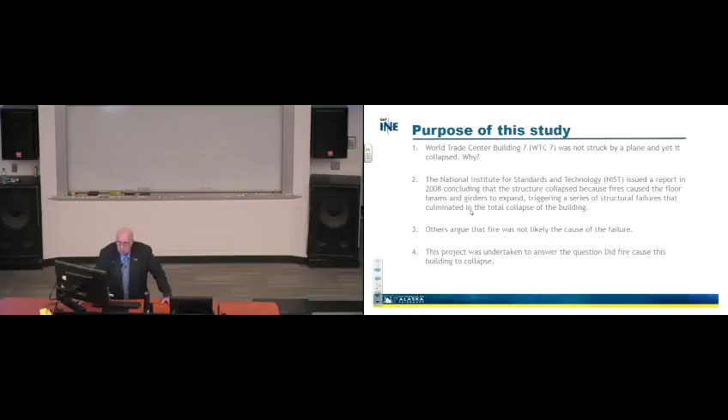More importantly, since this is a progress report, this is not a traditional slideshow with just bullet points. There's quite a bit of prose here, and the idea is that this will go out and be available for you to read additional information if you would so choose. We're going to be transparent. We welcome any questions. We're making everything we've done available, so that everything we've done is scientifically tested. We'll have a peer review committee to make sure we've met all those standards.

The methodology: today I want to share that with you. We first assembled the available documents, construction drawings, etc., that were available for this building. Traditionally, I would have liked to go in and pick up all the pieces of the puzzle and put it back together like a typical airplane, but they did not exist, it wasn't available. So we've done the best we can with all the available documents.

Basically, what we did is create an AutoCAD drawing to build a virtual geometry of this 47-story building. In digital form, you should be able to see every piece, every puzzle, every member, and it should look exactly like what was used in that structure. That's what we did.

We then prepared an Abaqus nonlinear computer model for the connections and framing of this building. That's a fairly sophisticated finite element program available that enables you to look in detail at how something will respond under a set of conditions. I know I have a mixed audience here, so I'll try to keep it as simple as I can, while sharing some pieces of complexity so those in the technical arena can appreciate that we looked at this in a fairly sophisticated way.

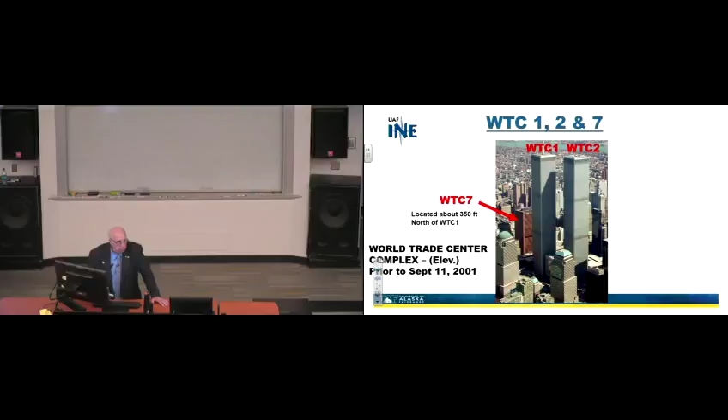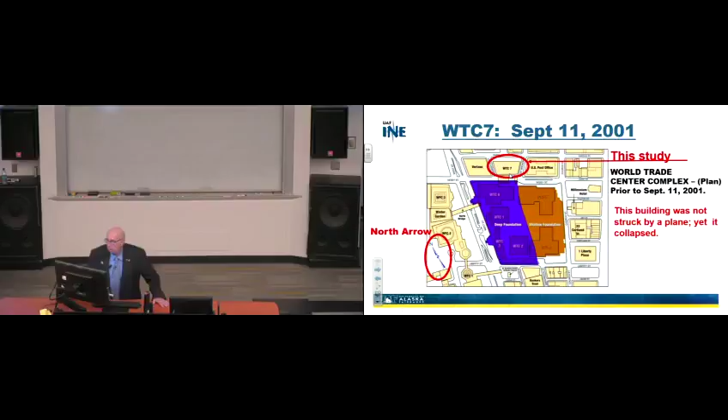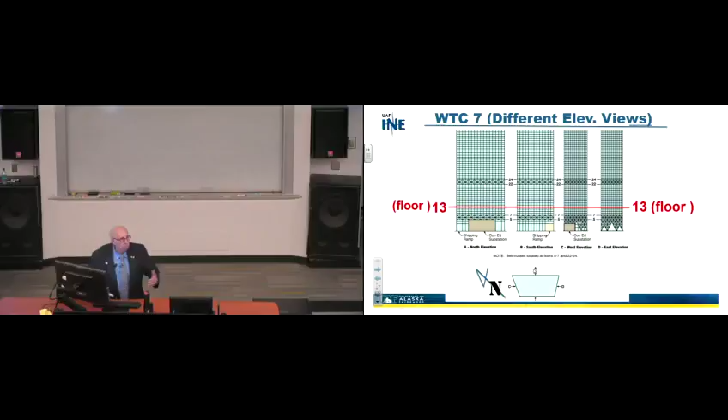So here is the south. Notice it's not as wide. And then here is the west elevation and the east elevation. Now within that context, here's floor 13, because we're going to spend a lot of time there. So you'll have some understanding of what's going on in that area.

Here are these perimeter trusses I was telling you about, at floor 5 and 7 and 24 and 22. Those trusses are resisting lateral loads. And then in the plan view, you see A, C, D, and so forth. There's that building in plan view, and here's what we're looking at. And down below here is the Con Edison substation, shipping, and so forth, all the things going on down there. So that's what it's built on.

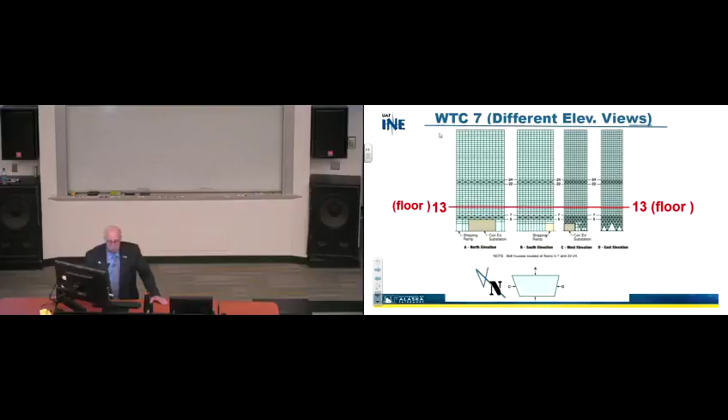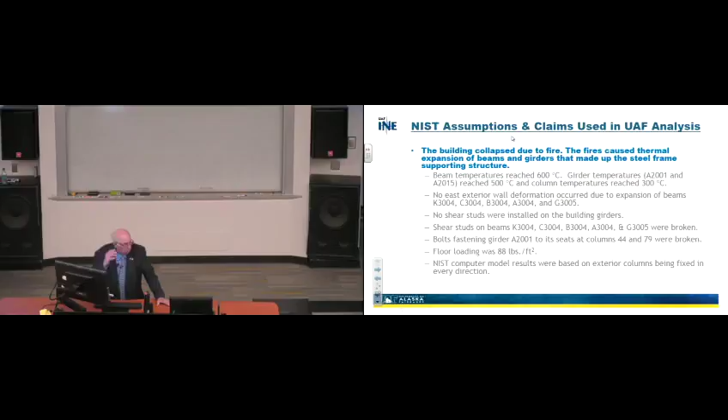But there are so many questions concerning this system. We looked at it from composite, partially composite, non-composite - meaning the slab can slide over the steel, not slide on the steel, or partially slide over the steel. We looked at all those possibilities. We also looked at whether the fire was underneath burning up the ceiling, or burning down the floor. All those issues were examined.

Here are their assumptions: the beam temperatures reach 600 degrees C. The girder temperatures, A2001 and A2015, reach 500 degrees C.

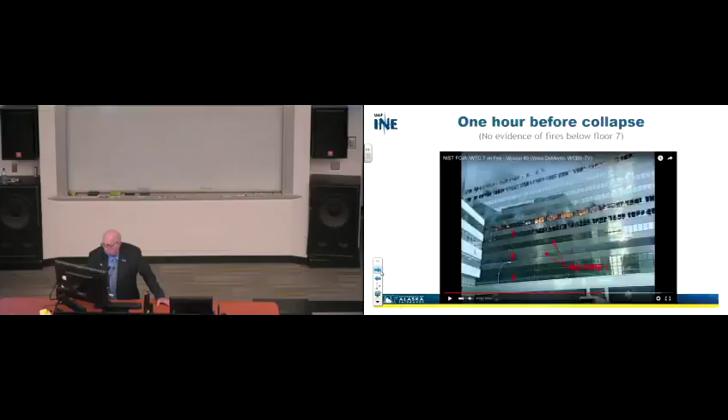The beams didn't get that hot. When we take a look at the girders, they reach 500 degrees C, and the column temperatures only reach 300 degrees C. Now that's significant, because there's a point in time, and I'll show you in a moment, whereby the steel begins to decrease in strength and modulus when you reach a certain elevated temperature. So the first thing I would have thought about when I got involved here is, okay, the columns obviously got really, really hot, and they lost strength, and we would have ended up losing the building.

Nobody seems to think that ever happened. Furthermore, there weren't a lot of combustibles in there. So no east exterior wall deformation occurred due to expansion of beams. That's their assumption, in beams K3004, C3004, and so on.

All right, so now moving on with that idea in mind. We've got all that beautiful thing captured in our minds, we're ready to go. So there were no shear studs installed on the building girders.

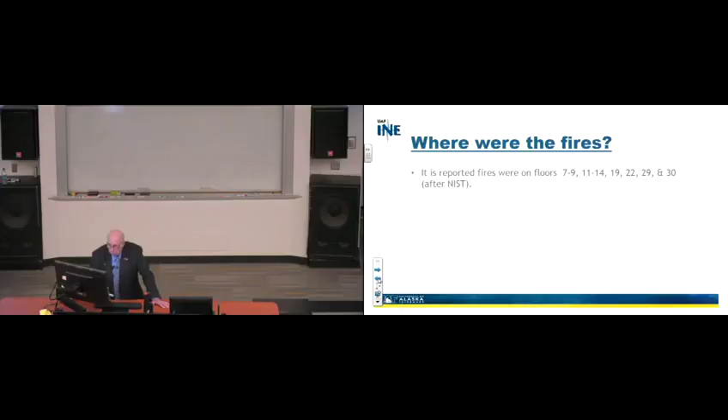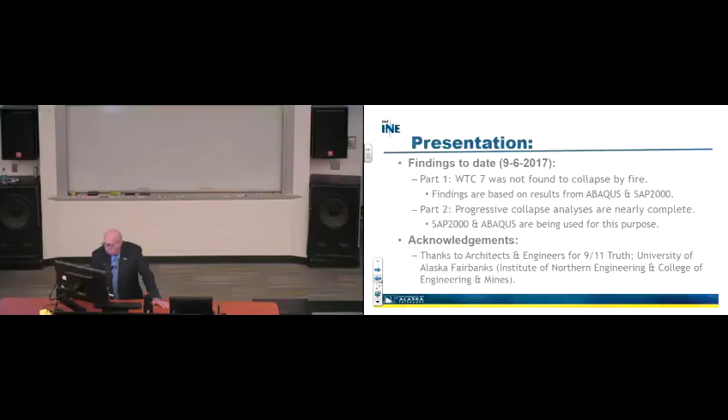The bolts fastening girder A2001 to its seat at column 44 and 79 were broken. That's significant. So let's go back here - here's 44 and there's 79. And they're saying the connection of this girder to those beams, to those columns, the seat connection, did not function during that period and therefore lost support, lateral support, and produced a problem.

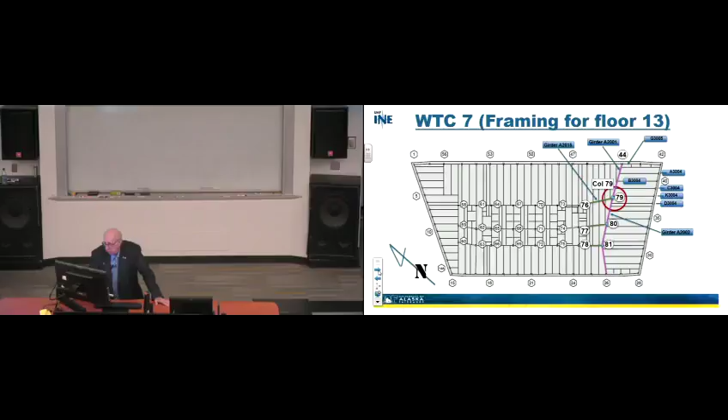So they've lost those supports, meaning those two columns no longer have lateral support at that level. Did they possibly have a problem later? The floor loading was 88 pounds per square foot.

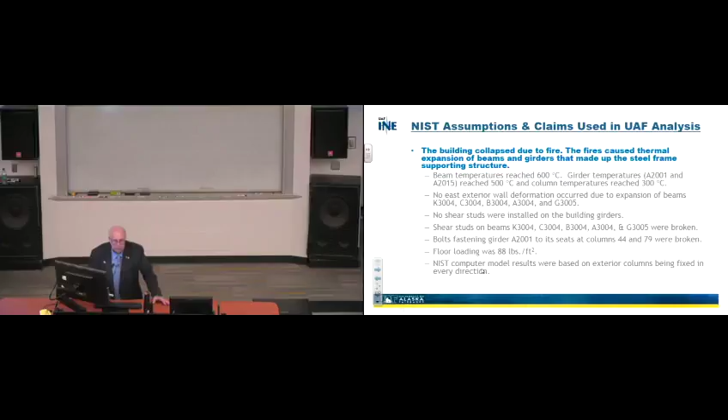The NIST computer model results were based on exterior columns being fixed in every direction. That's kind of a significant thought. All right, so now looking at their plans - this came out of the NIST report, page 343, 2008. This gives you a geometry - that's a 45-foot length from 44 to 79.

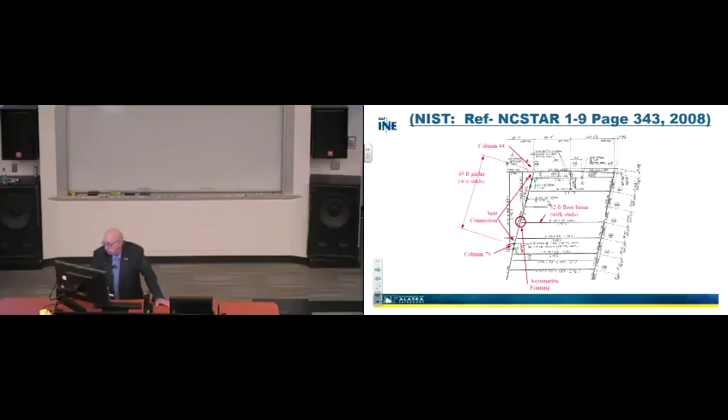45 foot, that's a girder length. 45 foot, that's longer than this for sure, you see what I'm saying? That's not small - this is a huge building, 600 feet across, for God's sake. So here is 50-some feet here, 52 feet across.

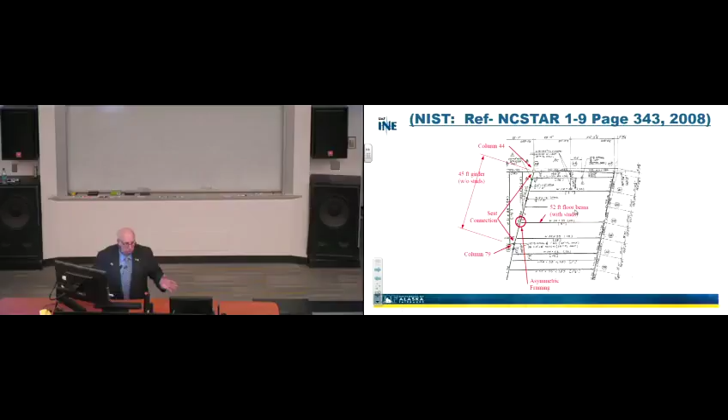This is our exterior wall, I'm in the northeast corner of this building. Is that clear to everybody? Here we are in that trapezoid world. Notice that there's asymmetric framing - these beams, those beams, for God's sake, are 52 feet long. That's not small. I mean, where in the world do you see that kind of stuff?

So anyway, in their view, by taking a heat model, putting fire on it, and then subjecting their finite element model to an increase in temperature, they got a thermal expansion. Their thermal expansion looks like this - that actually is this girder right here, A2001. It expanded, and they said it pushed off of this bearing seat, and thereby they lost support.

And then these cascaded downward, okay? So that's basically what we're talking about here. There's that girder I'm talking about, there's that exterior, and here are lateral supports for this beam system through here.

So what were their conclusions? First of all, fire-induced weakening of critical columns did not cause WTC7 to collapse - okay, didn't get hot enough. They're saying that 300 degrees is not hot enough. No argument. Temperature in column 79 was below 200 degrees Celsius. I think that's true - I might have to look that up as a reference again, but I'm pretty sure that's about what it was.

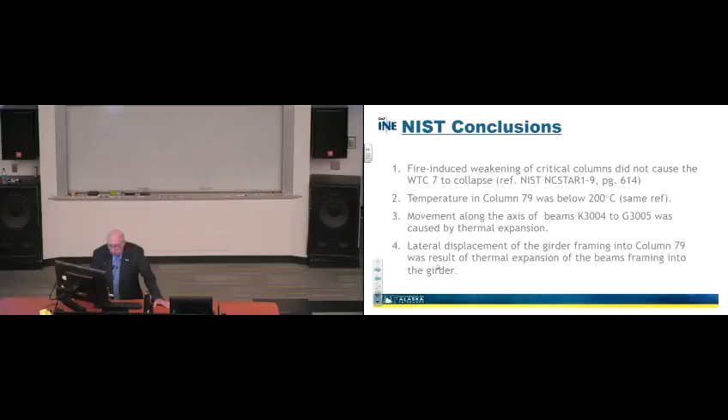Movement along the axes of beams K3004 to G3005 was caused by thermal expansion. Then the lateral displacement of the girder framing into column 79 was a result of thermal expansion of the beams framing into the girder. All we're saying here is when these heated up, they got longer. This was fixed, so they're all going to move to the left - that means they move what direction? West. And in moving so far west, what happens? Well, they're going to try to move - is there enough space to hold them in place?

That's what their argument is, right? That's key right there. And that's what it looked like - bang, bang, bang, bang, right? This thing bowed outward, and so this moved and that moved.

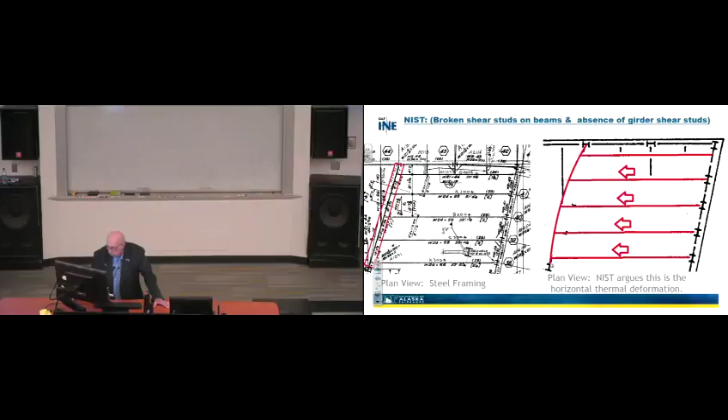Okay, this is the cascade issue they mentioned. The buckling initiated here at floor 9. All these issues mean they lost lateral support of that column. This is column 79, the one we've been focusing on. Without any lateral support, and because of that length, it cannot take nearly as much load as it was designed for.

Consequently, the vertical support and lateral restraint exist in the north only, so there's a huge problem. There's full lateral support up here, and partial lateral support down below, down at the very bottom in the Edison area. Those are all laterally supported. But between this zone, they said, it went away.

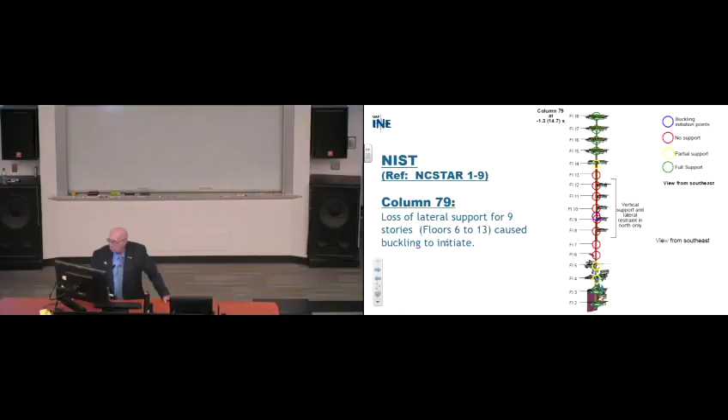So the loss of lateral support for 9 stories, floors 6 to 13, caused buckling to initiate, which means you lost it. Okay? Is that clear? Everybody clear about what I'm saying here?

Now let's take a look at their model for a moment. This is looking at a partial view of that trapezoid, down here, partial. We're seeing a partial of it. This is the northeast corner. There's column 79, and in that blue area, it's kind of significant.

That blue is where they put, at every place a beam and a girder come together, a column to girder connection, a beam to all these kinds of things, there's a connection that's on the drawings that says here's how you will build it. You bolt it together, you make it do whatever you want it to do, and that's the way it was supposed to be built. Remember the north arrow is here, this is the west side, the east side is to my right.

This is after NIST, the area of floor where connections were modeled on floors 8 to 14, and that's in the blue area. Over here, that wasn't done. So there's column 79, here's the area outside of the thing, and now let's take a look.

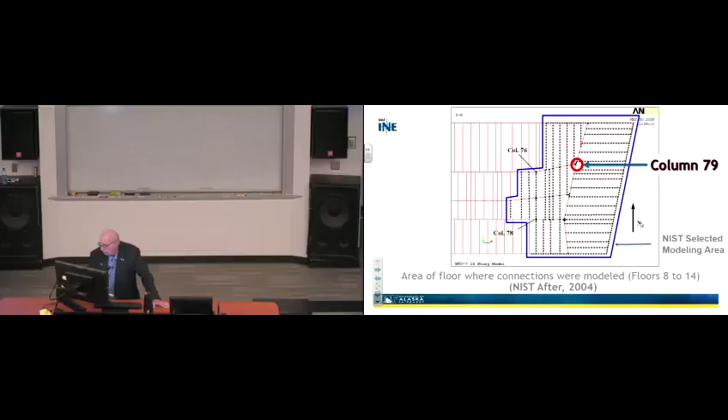Outside the selected area, connection failures were not modeled. NIST used fixed or pin connections. So automatically you have to ask yourself the question, do they have the same stiffness as what was modeled here more accurately? And so the corresponding question is...

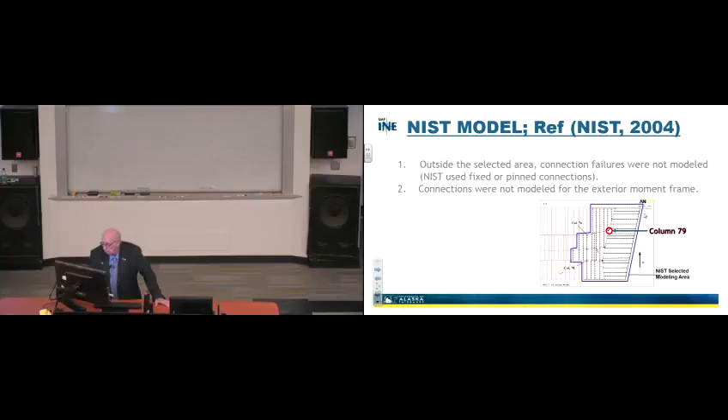Does it have an influence? Does it change how the system is going to respond? The connections were not modeled for the exterior frame, and the columns themselves were treated as fixed.

Also in the NIST documentation, page 525, 2008, a girder was considered to have lost vertical support when its web was no longer supported by the bearing seat. That means if there's loss of bearing support on A2001 coming into column 79, then it's lost. The bearing seat at column 79 was 11 inches wide.

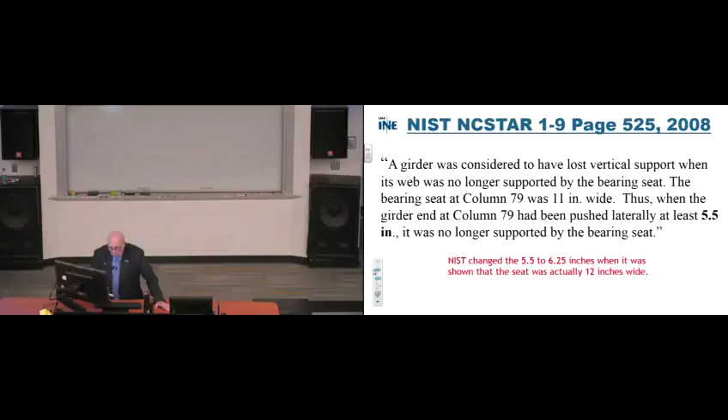Thus, when the girder end at column 79 had been pushed laterally at least 5.5 inches, the web was no longer supported by that bearing seat. NIST changed that 5.5 inches to 6.25 inches when it was shown that the seat was actually 12 inches wide. So that's something to think about - why did that happen? And that was later.

So some of the NIST results are the following. Pardon me if I'm boring you, but this is a passion for me. Let's just take a look at what actually happened.

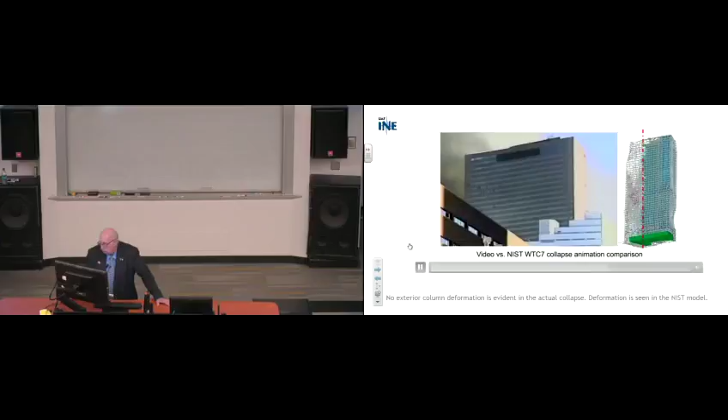Okay, so anyway, let's go on. Here's the NIST model that we were just looking at. And here, this is the other side, flipped, where that modeling was actually done. This is column 76, 78, and 79 is in here. They were looking at this finite element progressive model they were using to look at that.

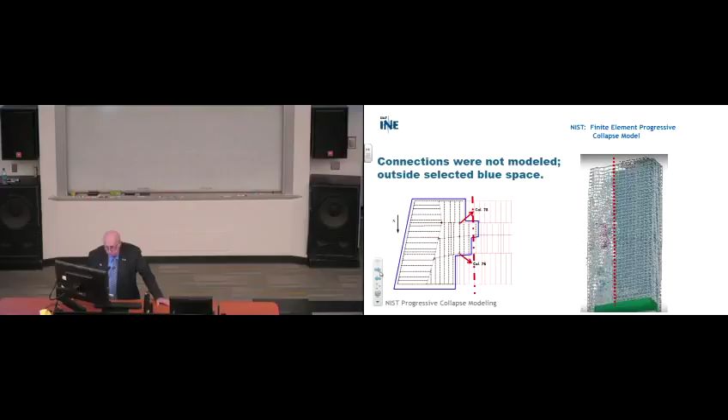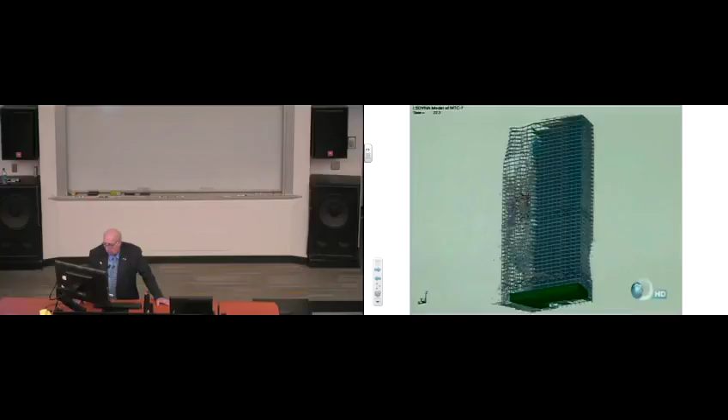I suppose we could even look at it from a different perspective. And there it is again. This is what they're doing. You have to ask yourself the question, though, why is it so much different on one side than the other? You see what I'm saying?

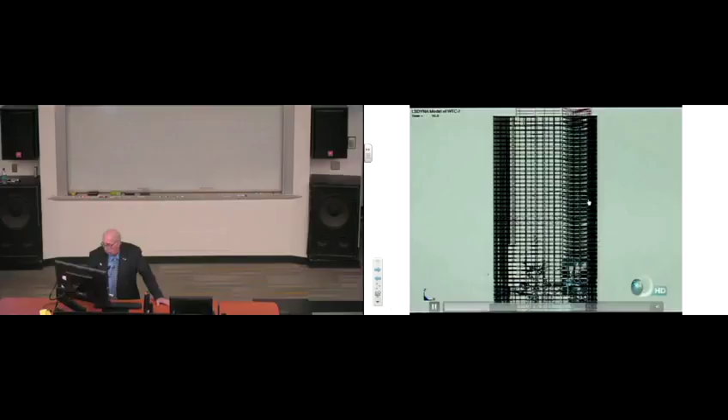And here's things that they, because of some damage that came in from the debris falling through the windows and stuff, they're accounting for some of that stuff. Anyway, all right, so let's talk about UAF for a moment.

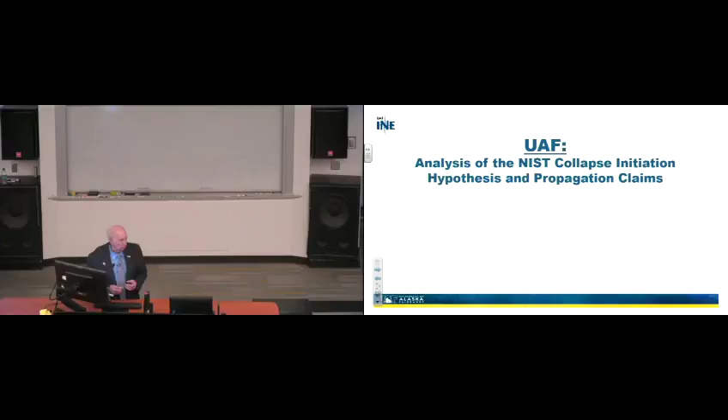Analysis of the NIST collapse initiation, hypothesis and propagation claims is really what we're about to embark upon, which is how valid is some of this stuff from a science point of view.

So UAF analysis of the NIST collapse initiation, hypothesis and propagation: we created a solid model in Abaqus of the structural members in the northeast corner of the 13th floor of WTC 7, and a finite element analysis was then performed to replicate the results claimed in the NIST WTC 7 report that girder A2001 was pushed or rocked off its seats at columns 44 and 79 to initiate the collapse of the building.

So one might argue that if those things didn't happen, would the building have collapsed? So, okay, so here we go.

This is the area I'm dealing with, right in here. There's column 79, there's that girder A2001, there's 44 and 79. And the question then becomes, how does it behave?

So what we're going to do is create part of a finite element model, and we're going to be really conservative. We're going to force things to happen that's worse than the real world, okay? And in so doing, if we can't force failure, then it couldn't have happened. Are you with me on this point?

All right, so that being said, we're going to fix the ends. We're going to force movement through girder A2001 by heating it up. This over here is going to be heated up. These beams are going to get heated up, and they're going to be fixed in the other direction. So we're pushing it each direction, making matters really, really the worst possible.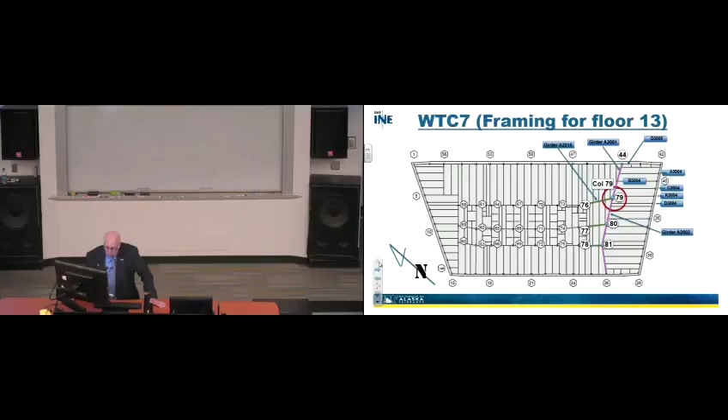And this is what that model looks like before it gets run. So we don't have the entire floor system here. We do, by the way, have the entire floor system, but for this analysis, to evaluate what's going on right here at column 79, that girder, this condition, we're looking at what we need to do, and that is look at the boundary conditions to force that condition to be absolutely the worst possible.

Okay? We did that. And so this is the beginning. You'll notice everything's zero, the stresses are all zero. We haven't put the temperature on it yet.

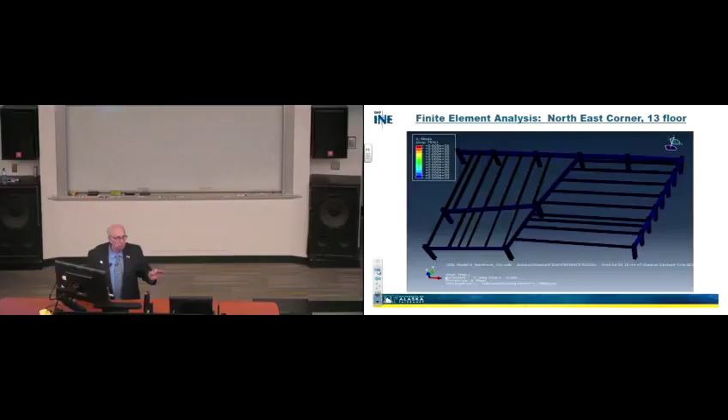Okay, this is the column that we're talking about, column 79. This is really significant, by the way, because column 79, if you look at it, do you know what I'm talking about when I say a W shape? A W shape looks like an H. And that's what we're looking at right here. That's what that column was made out of.

It's a W14 by 730 standard structural shape. What that means is it's 14 inches deep, weighs 730 pounds a lineal foot. That's a chunk of change.

Now within that context, though, what they did is they built side plates on it, and they closed that box. They closed it so it has structural integrity, resisting twist, significantly. But those edges, those 2 inches by 26 inches buildup, means that there is a lip on each side of this, and they're going to literally put on that flange the bearing plate.

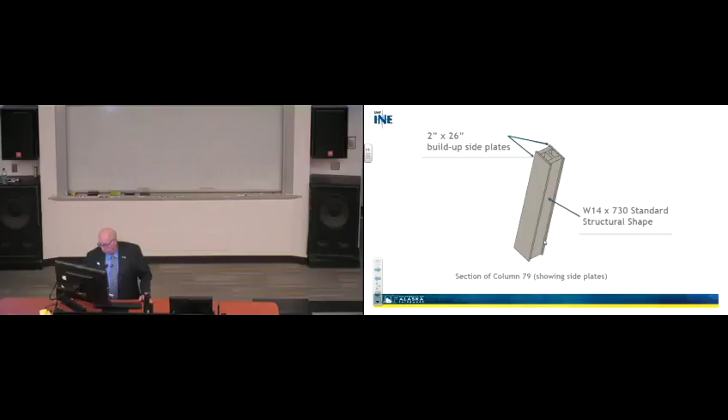Okay, are you following me? We're going to turn, that column stays vertical, but we're going to put a bearing plate in here. Okay, so there's what it starts looking like. We're looking at it right now. Plan view, A2001, going over to 44, and there's a connection to column 79. And see that lip right here? Those lips? Okay, got it?

Understand? So if this thing starts moving, and it's getting shoved, and if it's getting shoved to the west, which is to my left, it's probably your left too, then it can't get past that thing, unless something happens or breaks, right? Does that make sense?

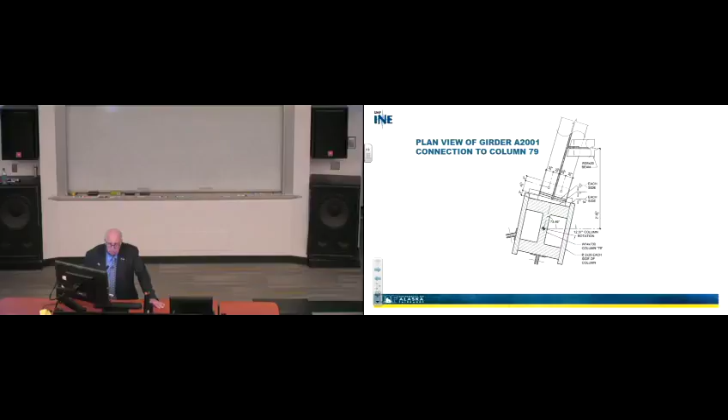So the plan view of A2001 moving across its bearing seat at column 79 due to thermal expansion of the beams framing into the girder from the east is here, and it gets shoved. Note that this picture illustrates that A2001 is trapped by that column side plate, and it's not possible for it to move beyond the seat claimed by NIST. They're saying it got shoved off and fell down.

The fact of the matter is they didn't have the side plates on it. They weren't there in their model, so they wouldn't have found that. But yet they did exist in the structure, in reality. It appears that NIST did not examine the side plate influence on the restriction of movement by that girder.

Okay, so now let's take a look at what else we looked at. And this is just part of the puzzle, because we've been playing this game for 2 years, so this is just a few weeks of stuff. The model shows the influence of thermal expansion at the northeast corner of floor 13. Here we are - there's column 79, column 44, and there's the northeast corner, and here are the beams framing into that girder system.

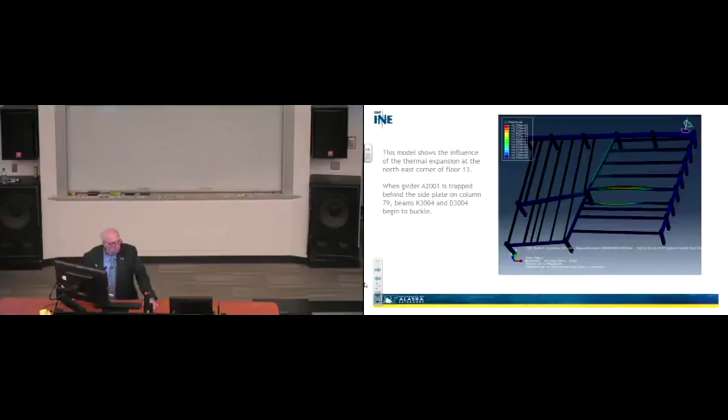So when girder A2001 is trapped behind the side plate on column 79, these beams begin to buckle. In other words, they can't go anywhere. It's heating up, it's pushing, and they can't stand the amount of axial load that's been imposed upon them. So they begin to try to displace out of the way and relieve their states of stress. Are you following what I'm saying here?

So fundamentally, that happens. This is out of the NIST WTC 7 report, figure 8-22, which is showing basically the concrete slab, metal deck, all that kind of stuff - exterior columns out here, and this is basically column 79, column 44, and how that column is, and the girder here, and so forth, okay?

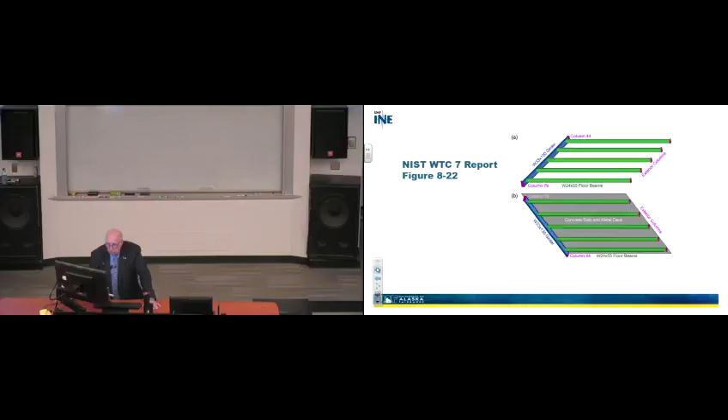And here's what begins to happen on the exterior columns according to their stuff, okay? And so they did not have those side plates in there.

So let's treat for a moment the lateral support beams, S3007, and here we are in this area right here. See those little beams in here? They play a role, and that means that they provide lateral support for that beam, also for that exterior. So they're forcing them to act together, not individually.

So if things actually got out of hand, you have a lot more capability from a lateral torsional buckling point of view or an axial load point of view. And so the lateral supports on us were left off in G3005, okay, of this beam. They were left off. Those were left off. Yet they're there. So that means that—

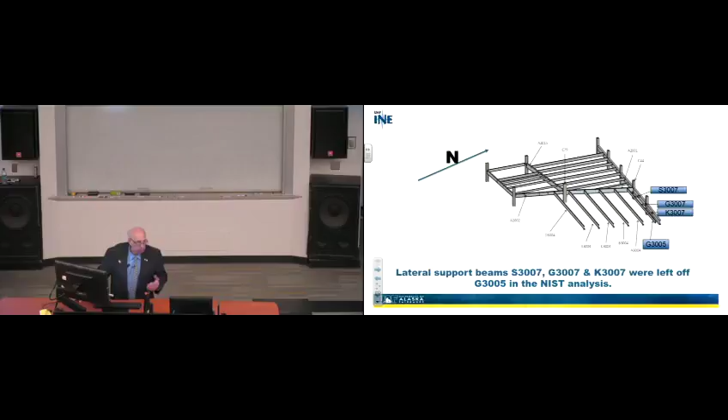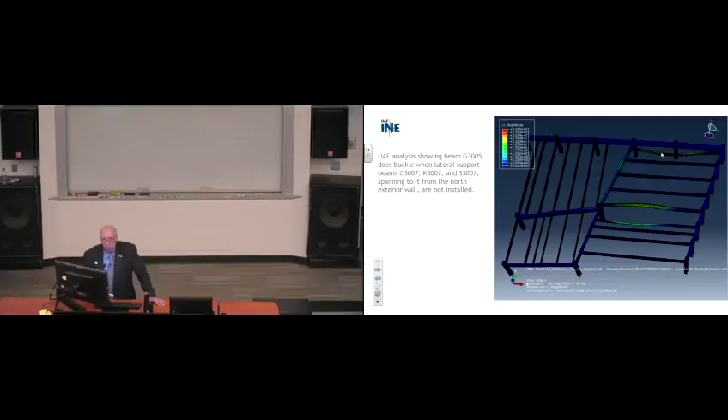Something could happen, and there it is. So the UAF analysis showing beam G3005 does buckle when lateral support beams 3007 spanning to it from the north exterior wall are not installed. Okay? So if those are not installed, it's going to buckle. Okay?

So the UAF analysis also shows that girder does not buckle when you have them in. There's a huge difference between those two thoughts and what that might mean to the behavior of this system, spanning to it from the north exterior wall as we see here, okay? So as everybody is getting a mental picture of this building, you should be almost getting an intimate view of what we've been living with in this picture, okay?

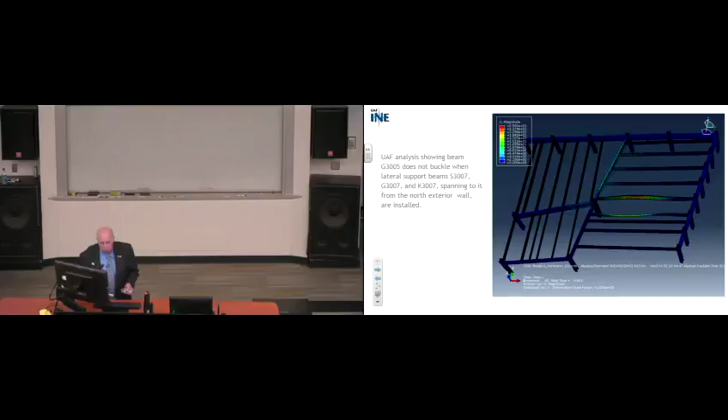Let's take a moment, take a breath of air. Section view of the actual configuration of girder A2001 at column 79 from the Frankel 1985 drawing 9114 showing there's partial height stiffeners in here.

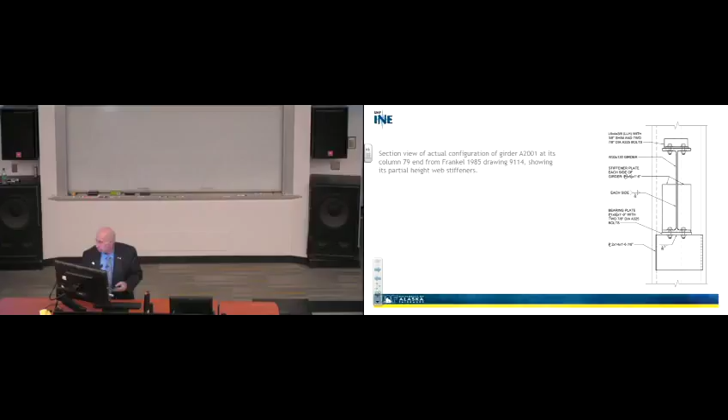Now, folks, let me just absolutely tell you, this is critical. Those stiffeners prevent this web from buckling. But more than that, it prevents these flanges from getting overstressed and flexurally having a problem - if they're there, if they're there. But NIST did not include them.

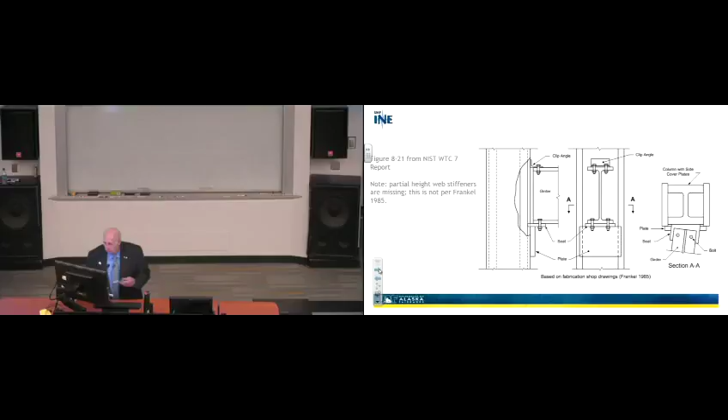So partial height webs are missing. That means there's some issues here that we literally - it affects the behavior of this system. So figure 8-23 finite element analysis from the NIST WTC 7 report, note partial web stiffeners are missing.

So the behavior of this interaction between column 79, A2001, column 44, the beams to the girder, the moving of the girder on that bearing stiffener - I mean on the base plate.

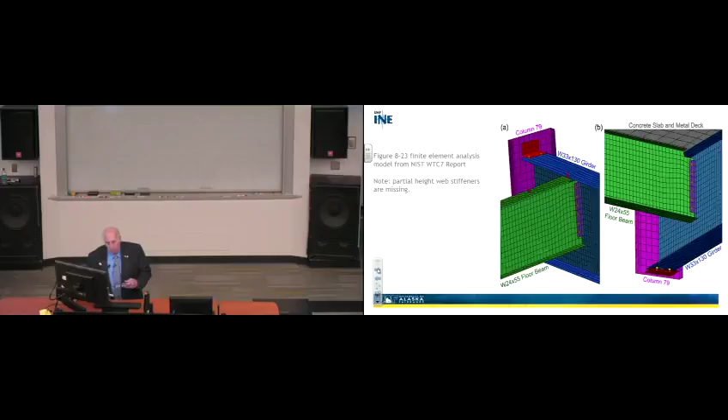Now remember, they didn't have the base, they didn't have the side plates, they didn't have the stiffeners, and all of those things are going to give you a huge added resistance to anything going on here. In spite of that, I'm going to share with you some other things that make it quite interesting. So here we go.

What if you don't have any side plates? The analysis was performed forcing girder A2001 beyond its bearing seat by removing the column side plate, increasing the coefficient of thermal expansion of the beams framing into it by 40%, so we could get that kind of movement. That's not true, we did it just to see what could happen. Without the increase in the coefficient of thermal expansion, the web would not have moved sufficiently to get it off the bearing seat. We wanted to see if we could make it move. That's at column 79, that's A2001. Is that clear? Everybody got a mental picture of what's happening?

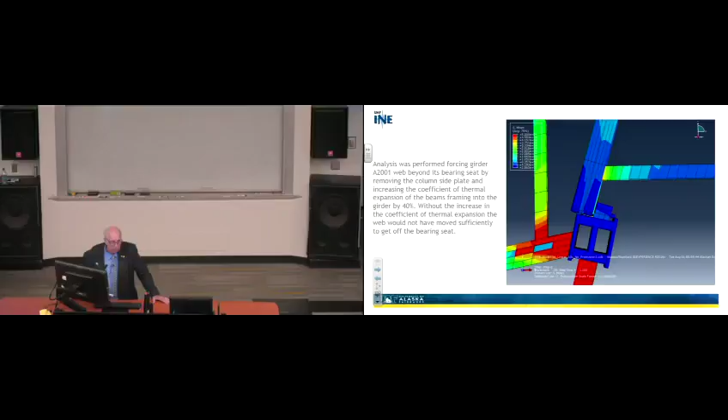Well, again, this is the UAF analysis that shows the girder will not fail with the partial height web stiffeners installed. That small area of high stress is not in the load path, right here, right there, is not in the load path. That's a point of high stress, by the way, but it's not in the load path, and it's due to the tip of the girder being compressed against the flange of column 79. This is not a structural concern. It's a fact that there was some overstress there, but it's not going to cause the building to come down.

We also conducted a modal analysis showing the 52 Hz frequency mode of the falling beam and girder assembly, which was needed to calculate the combined stiffness of the contacting structural members and the subsequent impact load on the girder below the 12th floor. So here we are on the 13th. It falls, drops off of that base plate, drops down, beams go, girders go, concrete goes, all that stuff happens. You're going to have stiffness involved, you're going to have F equals MA involved, you're going to have those conditions, and so we looked at that.

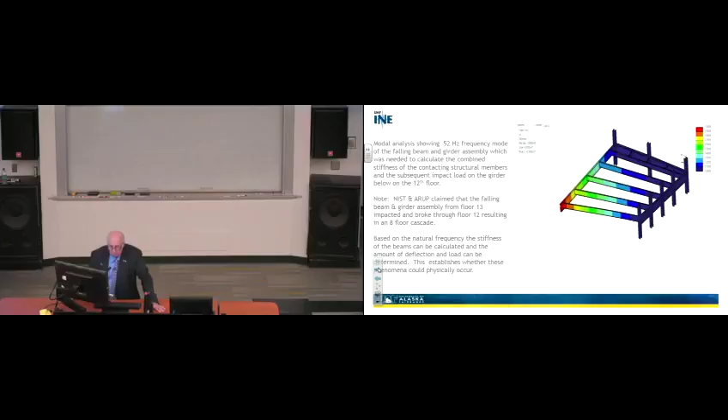NIST and ARUP claimed that the falling beam and girder assembly from floor 13 impacted and broke through floor 12 in an 8-floor cascade. Based on the natural frequency, the stiffness of the beams can be calculated and the amount of deflection and load can be determined. This establishes whether the phenomena could actually physically occur. I want to share with you, I'm not going to spend time on it, but those calculations are in the following pages. We did that to examine the issue, and that's where they are. You can go, at night while you're relaxing, you can read these. But I'm not going to read them for you.

So anyway, we had this 215,211 pound impact force, which is only 34% of the 632,000 force required, and thus insufficient to shear the girder bearing seat welds. The southeast corner floor 12 would not have collapsed if a girder at floor 13 came off its seat. That's basically what we're saying. Thus, the ARUP analysis did not show a basis for propagation, even if the girder were to fall off its seat at column 79. These findings illustrate the ARUP's explanation is actually invalid.

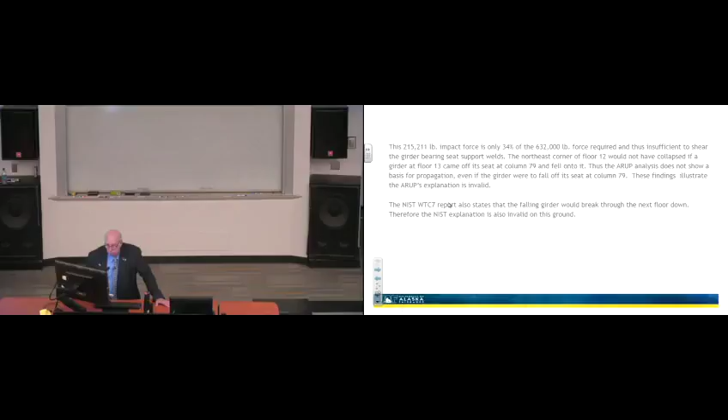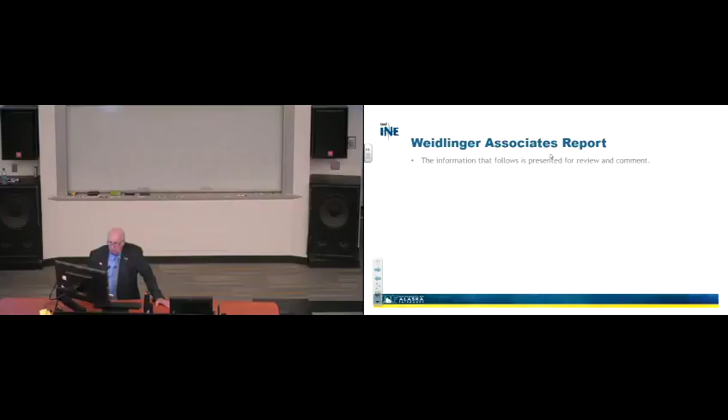That's another group, by the way, so there's more than one group involved. Weidlinger Associates' report - this information is going to be presented a little following this, and so here that is, if you want to read it. I originally had a change to this, and it looks like that change didn't get made, but I broke this out. So anyway, let's talk now about our approach, which is looking at things from a different perspective.

There was a 5.5-inch movement at the girder bearing support at column 79 according to NIST. The issue that led to that 5.5-inch movement was non-composite action at the main girders. Now what do I mean by that? You have concrete floor slabs, and on those slabs you have to decide how you're going to build it - are you going to build it with shear connectors to the flanges and make it act as a system, or are you going to leave them so that they can slide? So I looked at it both ways. I looked at it and said, okay, what if it slides? What if it's so lubricated between those flanges and that concrete that there's no resistance to movement?

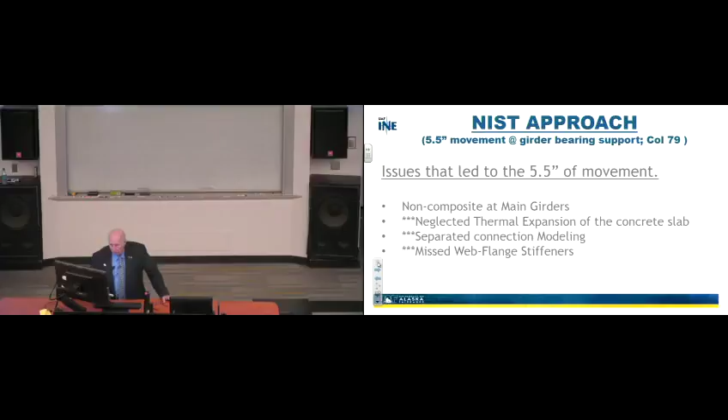What if there's friction between it? We looked at that. What if it's partially composite? What if it's totally composite? So all those, we neglected thermal expansion of the concrete slab, separated the connection modeling, missed web flange stiffeners were looked at. Okay, so all those issues going on there.

So our approach was to take a structural modeling and look at two programs, Abaqus and SAP2000. We established a quality control program by which we have two researchers, Zhili and Feng, each one doing the same thing much of the time and challenging each other, with me there as a referee to make sure what we got out of it was right. If we didn't agree, we had dialogue.

We would try to find ways of figuring out what's going on, what's wrong, until scientifically we were able to justify every step of the way. Takes longer, but it's valuable to make sure you have good stuff.

So in Abaqus, we developed nonlinear springs for structural connections. What does that mean? If you have members bolted together and things move, and it moves fairly significantly, then it's probably not a linear curve, not a straight line. It's probably going to deform non-linearly, and it may never come back the way it used to be. So we looked at a nonlinear response.

We looked at composite, partial composite, and non-composite. We looked at floors 12 and 13, and we looked at thermal expansion. In SAP2000, we looked at floors 12 and 13 again, and floors 3 to 47.

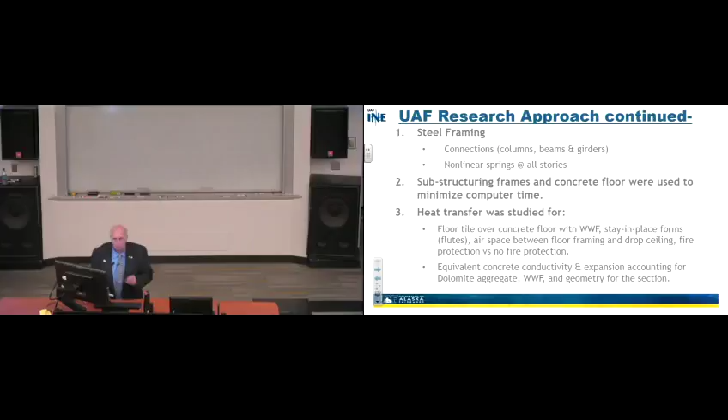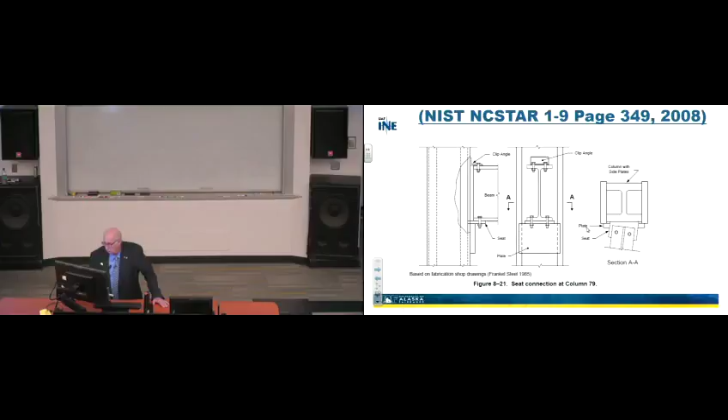So this again is the NIST seat connection at column 79 that they did, but they didn't consider those stiffeners. So here's the way we begin to model the actual system, the way it went together.

Here are those side plates, notice that they're there. Here's the girder coming in, and there's the partial height stiffeners. And so therein lies, they actually were there, and we began to model this from a computer program to digital, so we knew how this thing is going to behave when you put it together.

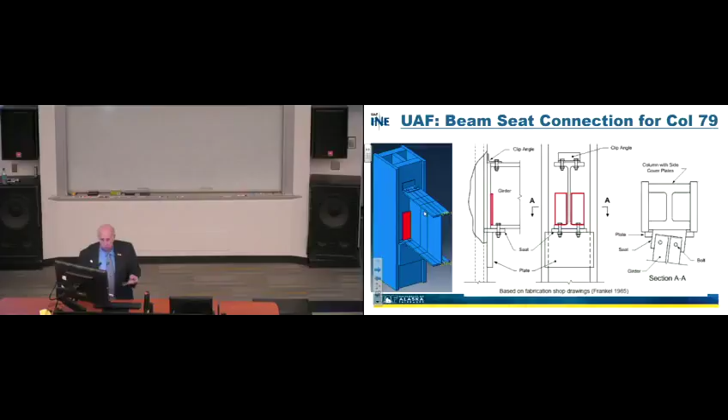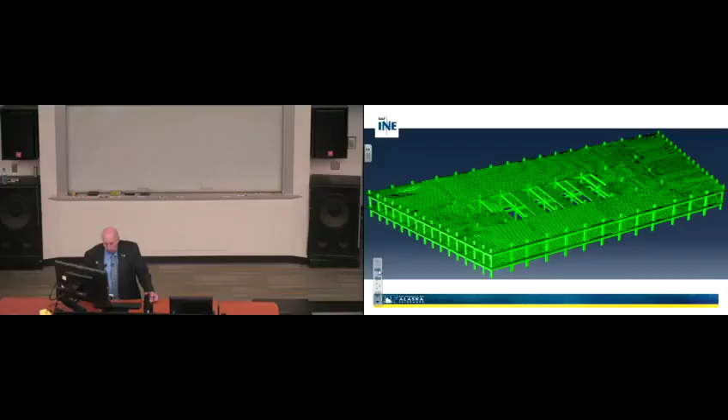Here's what that floor system actually looks like. By the way, these are elevator shafts. This is over in here, column 79. There's column 44. There's the exterior of that floor. There's the whole system. That's an Abaqus model we're looking at.

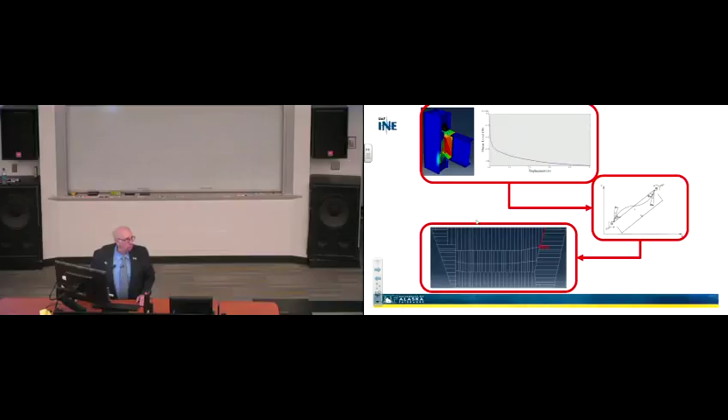UAF sample connection response. I'm taking every one of these connectors and we've identified this, calling it an STC. That's our name. What does it look like? It looks like this, that's the connection type. We plotted the shear load versus displacement on it, so we can always put that spring wherever it's at and get a response equivalent to using all that complication. So we threw it away, replaced it with an equivalent to save time.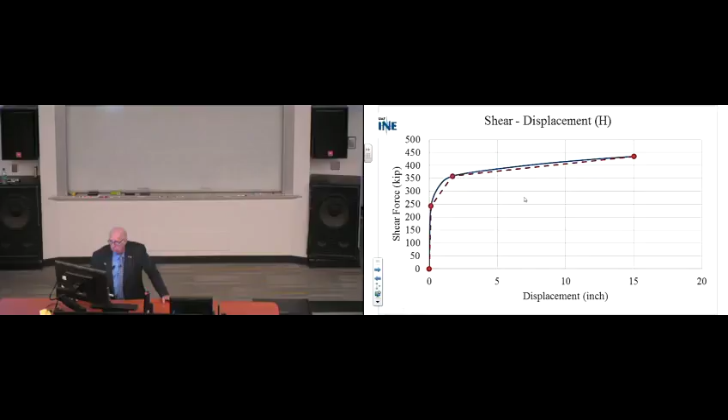So this is a simple model of floors 3 to 47 from SAP 2000, and that's what we're actually using to look at progressive collapses with.

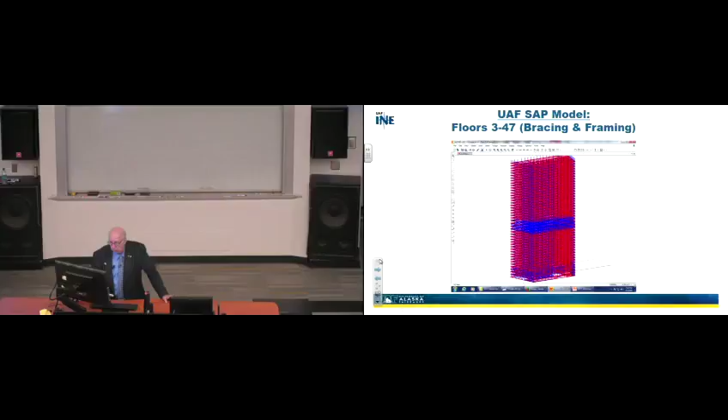So let's take a quick look at the materials that went into this thing, and I won't bore you too much, just a little bit.

The material properties: steel ASTM A572 had a yield of 50,000 psi. Thermal conductivity of the steel was 35 BTUs per hour per degree Fahrenheit. Here's the thermal strain value. Density was about 490 pounds per cubic foot. We also had some ASTM 36 steels in here, I'm just not showing you all of it. Concrete's 28-day compressive strength was 3,500 psi, density about 145 pounds per cubic foot, with dolomite aggregate. We got a thermal conductivity from it, an equivalent conductivity we're going to be using, and thermal expansion.

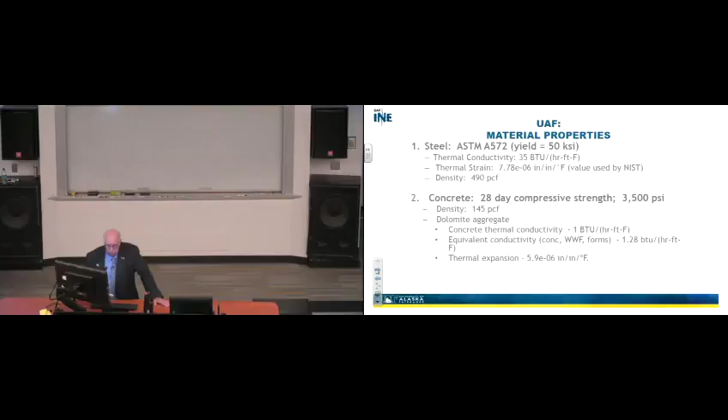So that's the kind of stuff that actually made up the model to simulate what we thought the building was going to be. We took and fixed the exterior column wall line here, as did NIST, and we subjected it to that heat-up model, and we got a very similar result.

Well, we didn't actually - we did. This is not... I'm sorry, I apologize, this is not the NIST model. This is our model. Here we have the connections as they truly are, all along this system, throughout this entire floor system, how it actually was built.

Then we heat it up. By heating it up, we have a dead load here of about 5,142 kips. We have a movement of that section right there of almost 2 inches, but not west - it went east. Totally different. The floor moved east at column 79, not west. And by the way, they moved together, they didn't move separately.

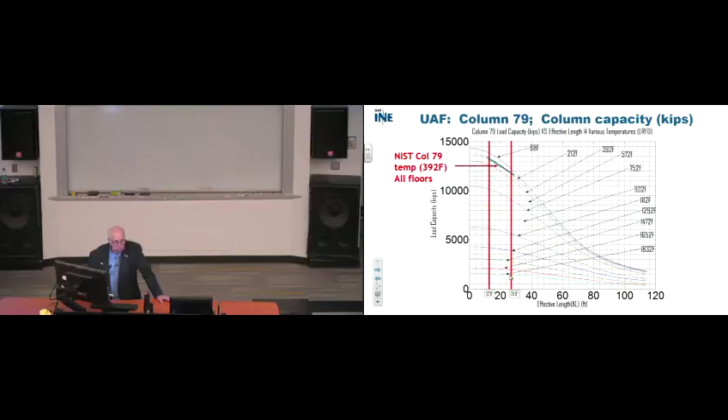So here's the material response versus temperature. Here's the column 79 capacity curve as a function of temperature. You can see even if you drop down into here, you don't get much change - column 79 at 392 degrees Fahrenheit. So this is load capacity versus the effective length for these various temperatures. This is 1832 degrees Fahrenheit. I think you can see it can make a huge difference, how much the capacity of that thing changes.

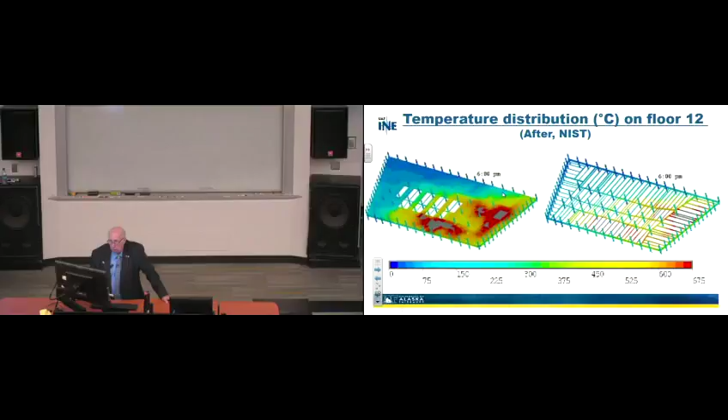So let's talk about the fires we actually put in this building, and here's what they were on floor 12. There's that whole area at 6pm, and then there's the fire. That came from the NIST models, and we used them at this point. Same here on column 79, floor 12 and 13. UAF Abaqus structural expansive movements - just want to share with you. This is the model we're talking about, this is floor 13.

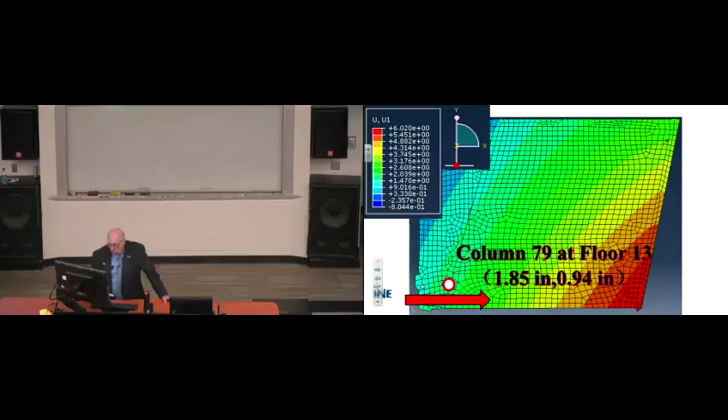This is column 79 at floor 13, 1.85 inches to the right. That means east, not west. So this whole thing moved. I'll show you a different picture here in a moment. So this is all this stuff to the east of this.

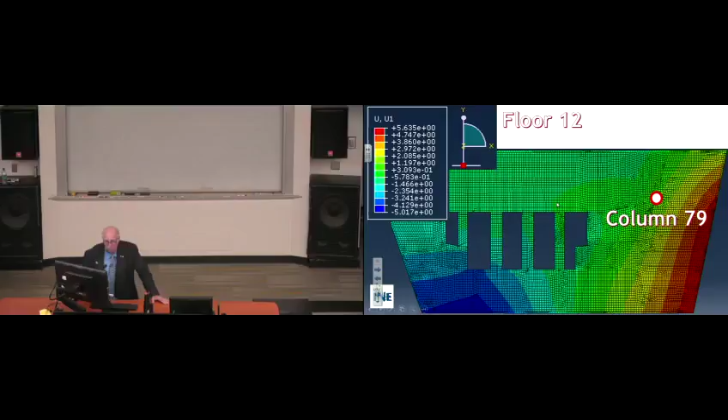You can begin to see the displacements if you start looking at minus 0.50, where's the zero at? It's over here somewhere. So here's column 79, moving with respect to this area over here. It's not moving with respect to this, and not moving with respect to that. It's moving this way and that way with respect to what we call the thermal centroid, which is your stiffer point. So basically you've got a center of stiffness by which this thing is behaving. That's what's happening here.

Our results in the SAP model show column 79 at 1.92 inches to the right. Abaqus, this is SAP, 1.85 in Abaqus. We did it two different ways and got very close to the same answers. NIST is 5.5 inches to the left, revised to 6.2 inches. And why? Because of some of the things I was telling you, in my view.

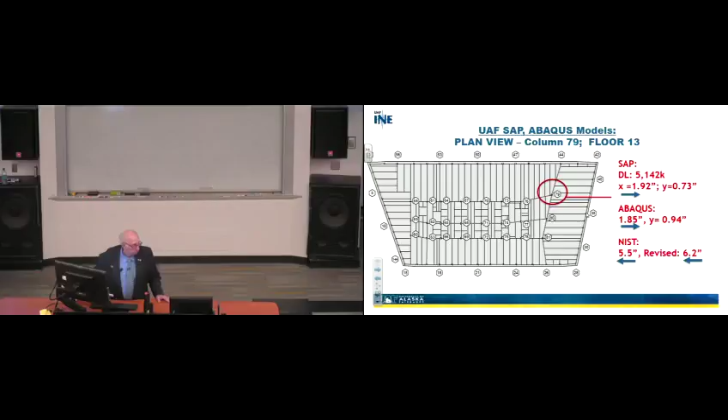So let's do a little comparative game. Floor framing, steel connections - UAF accounted for them, NIST partially. We have exterior steel framing connections including springs, they did not. I'm talking about the exterior walls - they had them fixed, remember? Floor is composite with beams and girders - girder to column stiffener plates at column 79.

What about the floor composite with beams and not girders? Both of us considered that. Composite with beams and girders - yes, but they did not.

Thermal expansion of concrete to the deck - yes, but they did not. Thermal conductivity and expansion of material properties - so what I did is I went back and got the aggregate, then I changed it to make sure we knew the thermal conductivity of the concrete and the thermal expansion of that material if they actually made the concrete, matched to the aggregate type. And so we accounted for that, they did not.

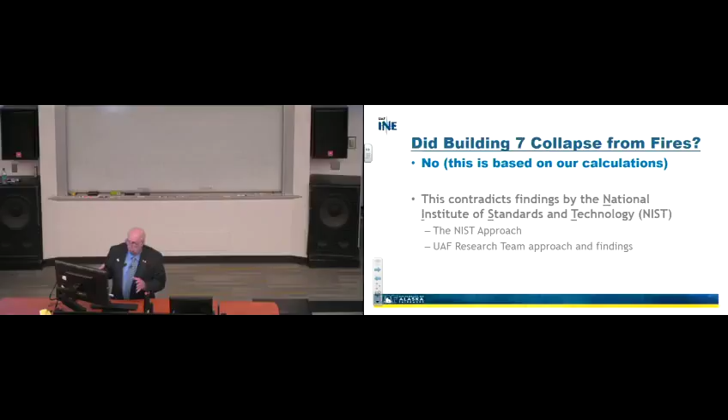Thermal horizontal movement at column 79 was less than 2 inches. Therefore, based on our analysis, column 79 temperatures were such that it did not buckle under any gravity loading - couldn't have happened. So did Building 7 collapse from fires? No, this is based on our calcs. This contradicts the findings by the National Institute of Standards and Technology, the NIST approach. So that was, in my view, the real way it actually behaved - not what you assume, not what you do in terms of boundary conditions, making things perhaps easier for yourself or whatever. So the concrete floor diaphragm stiffness is significant, even with no shear connectors.

Frictional resistance to thermal expansion is not trivial. We noticed that if you take those shear connectors out, since they argue they're not there - take them out, I don't care. When they go away, I have enough friction and enough shear connectors on the beams that it doesn't matter, it's not going to make a difference. So that's what we determined, and we looked at it both ways.

The thermal expansion of the concrete deck cannot be ignored, and it's likely less than the steel. The value is highly dependent on the type of aggregate. My research shows that thermal expansion of concrete can be as low as 2 times, all the way to 12, whereas steel is about 6.5 - depending on the aggregate. We used dolomite aggregate, and so we matched to whatever we had there.

The research team evaluated fire by considering the airspace below the beams, in the space between the drop ceiling and the structural steel framing. We did that because a number of people felt like it was important. The result is that the fire underneath will likely burn through the drop ceiling quickly, and its resistance to heat transfer is likely not available to help.

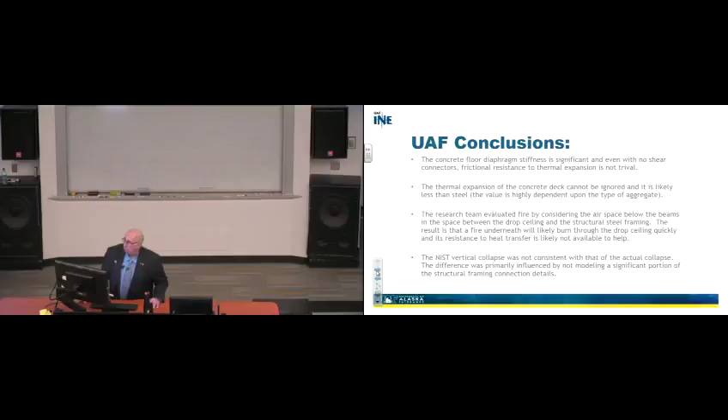So the NIST vertical collapse was not consistent with the actual collapse. The difference was primarily influenced by not modeling a significant portion of the structural framing connection details. There may be other issues, but certainly that had an effect - there's no doubt about that.

What's new? What's next? Well, we welcome your input. We welcome input from the world. We want to be able to make sure that our findings are based on scientific fact, and if there's a question, we're there to try to answer that and make sure our results are true and of value.

We're providing the study to be peer reviewed.

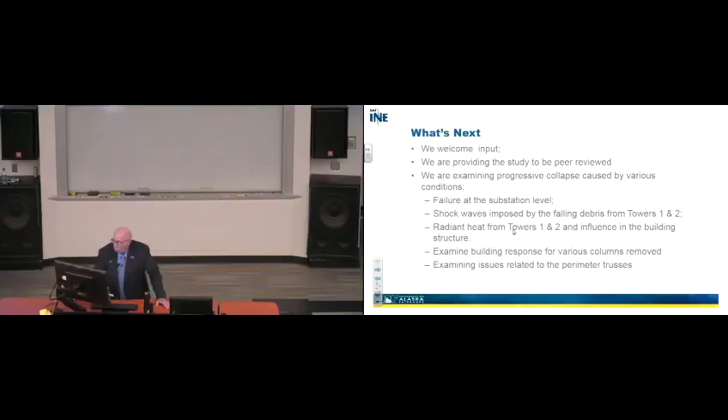We are examining progressive collapse caused by various conditions, such as failure at the substation level, shock waves imposed by the falling debris from towers 1 and 2, and the radiant heat that was imposed on that building structure by towers 1 and 2 when they heated up under the planes.

I'm interested in examining the building response for various columns being removed. We've already removed the inner core. I'm not sharing that with you, but it's very impressive what's going on. So then the question is what else is going on? We're examining issues related to the perimeter trusses. There's been a lot of questions about what if they had a problem? What would that mean to this structure?

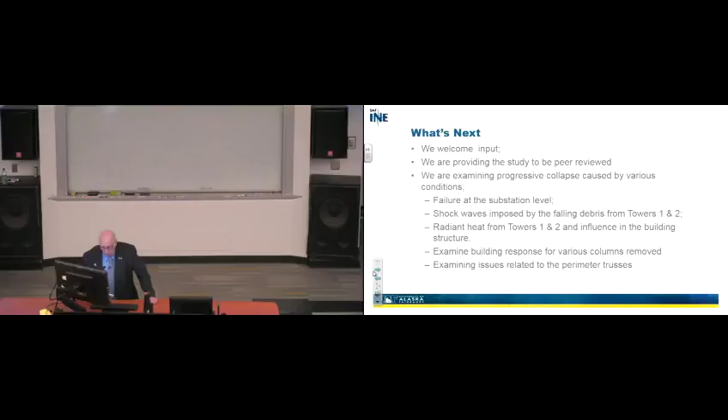So, I think, folks, that I'm done. Thank you.

We'll take some questions.

Yes, please. You mentioned that NIST did not model, for instance, the partial stiffeners and some of the shear connectors. Was there reasoning? Did they not find that in the wreckage and they don't think it was actually on the building? Or did they do that to make it easier to do the modeling?

I don't know the answer to that. I think it was an oversight. I don't know how they got to that level, but I think it was an oversight. We're just trying to, I'm not here to criticize, I'm simply here to make sure that we did it the way the building was built, and try to answer that question as best we can.

Yeah. For the people online, I should probably give you the microphone.

Yeah, I guess I'm still a little bit unsure. When you said NIST revised their figure, they added an additional 3/4 of an inch or so of expansion. Maybe I missed it, or maybe you didn't touch it, but what exactly did they cite for revising that figure? What was the variable they introduced that said, oh, we were wrong, there was an extra 3/4 of expansion? I'm not sure I know the answer to that either.